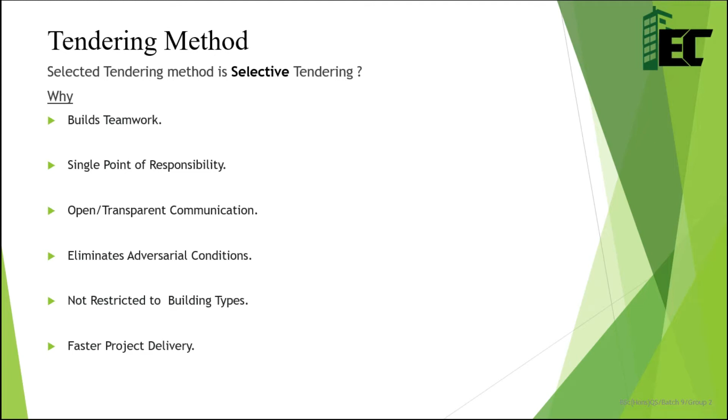Next, let's see what is the suitable procurement method. We choose the design and build method. There are five types of procurement methods: traditional method, measurement contract, design and build contract, package deal contract, and turnkey contract. We choose design and build because in this method the contractor gets the responsibility of planning, designing, organizing, and controlling.

In the traditional method there is a mismatch between the designer and contractor, but in the design and build method there is no such mismatch, so it is the most suitable. Advantages include low cost, low cost of documentation, better quality of workmanship, and competition only among similar categories.

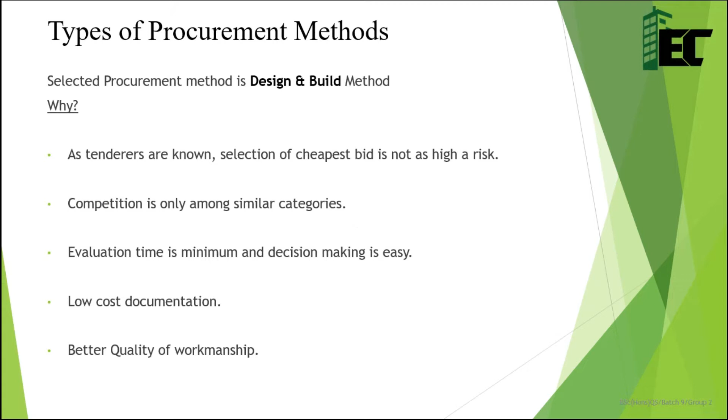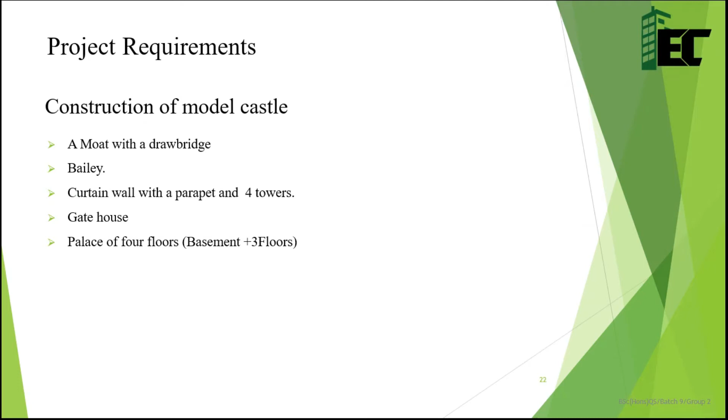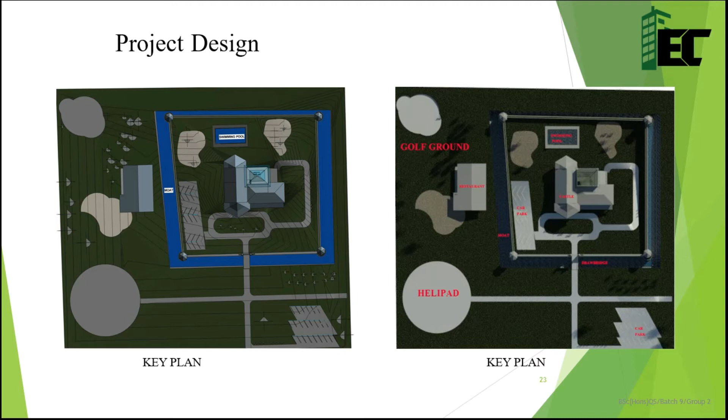This is the key plan. We have arranged the palace, swimming pool, roads, car park, golf ground, restaurant, and helipad. This is the construction plan, front elevation, and roof plan.

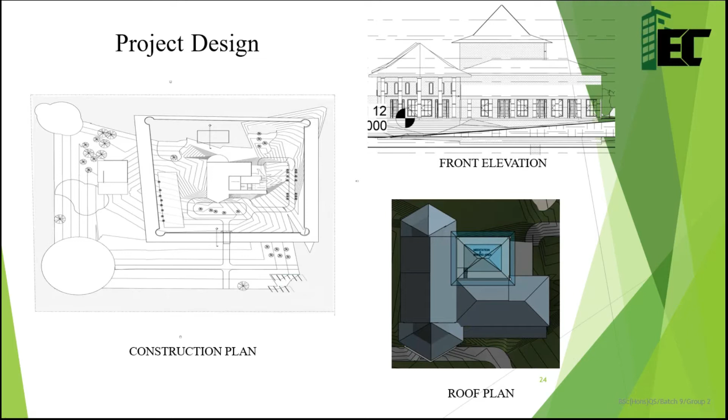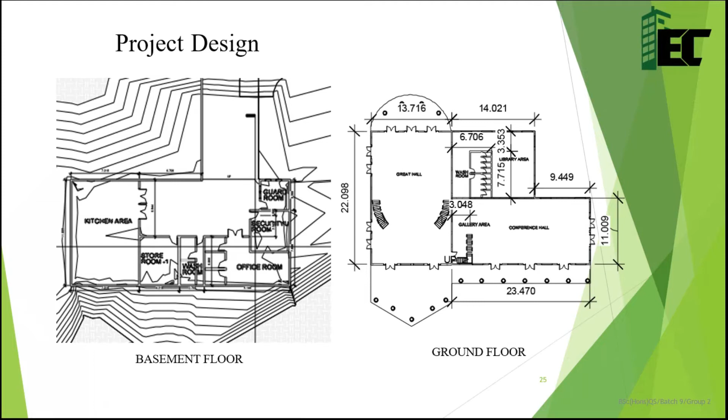Next, the ground floor areas: great hall, washroom, gents and women's washrooms, and especially an additional disabled people's washroom. We also arranged a conference hall with a library and gallery in the conference hall.

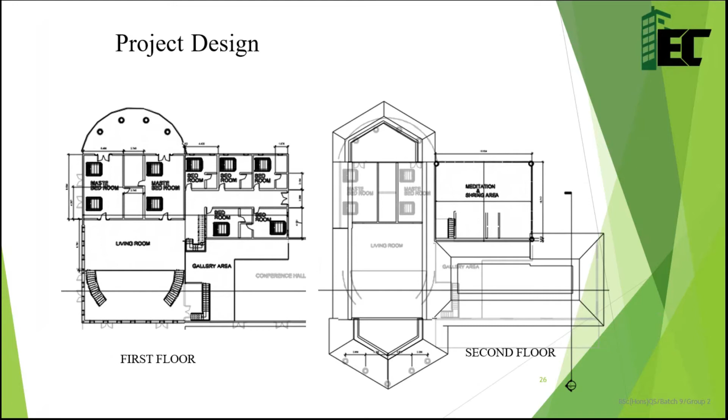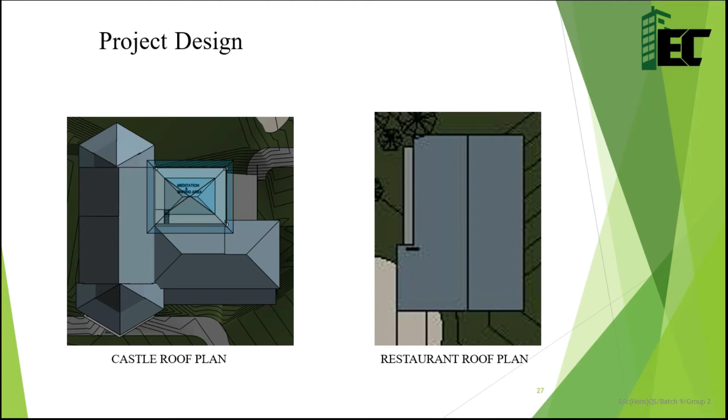The second floor is arranged as roof plan, a castle roof plan with an attached restaurant. This is the 3D plan view.

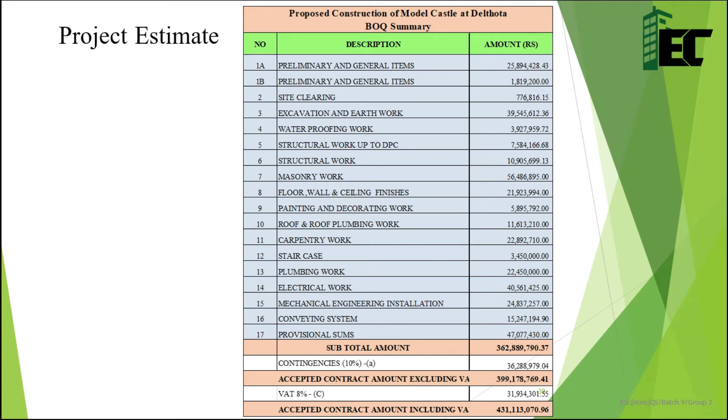Then, according to our quantity surveyor's plan, I calculated the project budget.

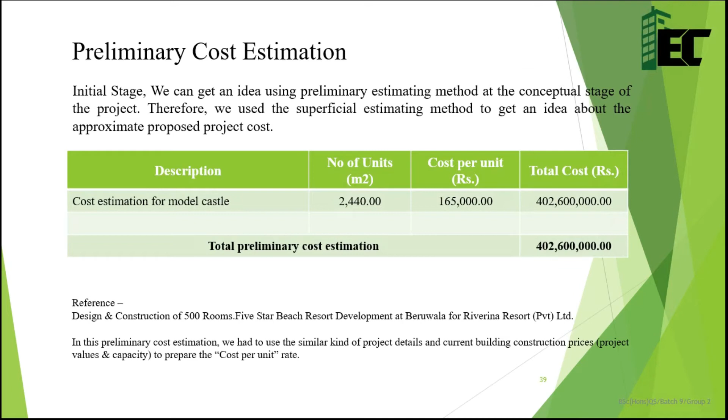Estimated value is 399 million. I have allocated 1% of the total estimated amount for architectural design work. Engineering and consultancy allocated 5%. Then initial operation cost is around 2.5 million allocated. Our project total amount is 425 million rupees.

Value added tax 8%, which is 31 million rupees. According to the total calculation, our project budget is 457 million.

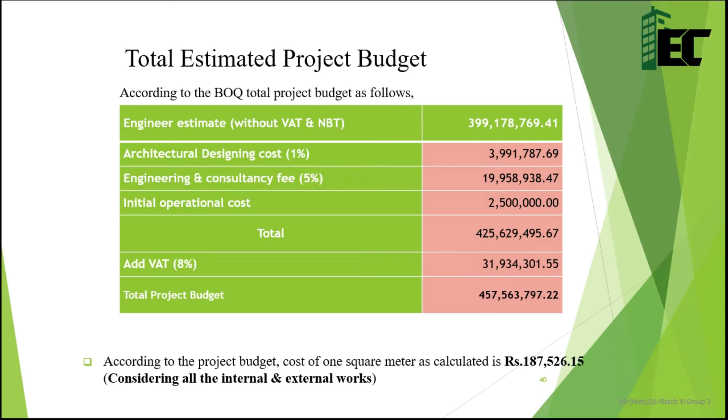Then we have to calculate revenue generation and income generation activities. We have to identify them. I have identified some activities. For example, in our project we have some type of rooms which we can rent out. Then we have to allocate a retail shop. Then we can locate a golf and sport area in our land area, and another one is a spa.

Then we plan a club and restaurant outside of our building area. We can arrange an outdoor restaurant, and then we can also arrange some outdoor activities and functions.

According to my consideration, I have calculated all expenses and income generating activities, and I allocated a discount factor of 10%. Then I have calculated our project's revenue generation.

How our income is gained, we can analyze this through four methods. In financial feasibility studies, we have four methods. According to these methods, the net present value method.

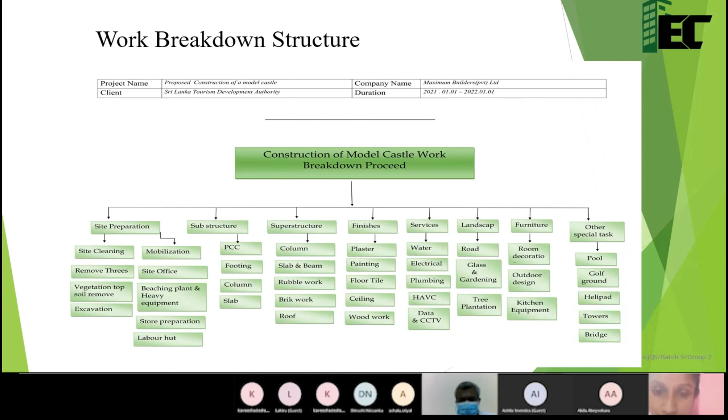Here is our work breakdown: site cleaning, removing trees, and preparing.

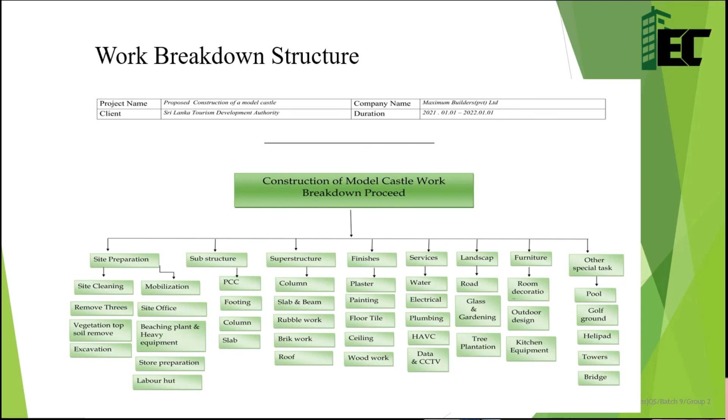I'm Machala, the safety and health officer in the project. As HSE officer, my main concerns are risk management and HSE issues related to the project. Risk management is a process of identifying the related risks and hazards, assessing the extent of the risks, evaluating its weight, and taking steps to control the risks, including further monitoring.

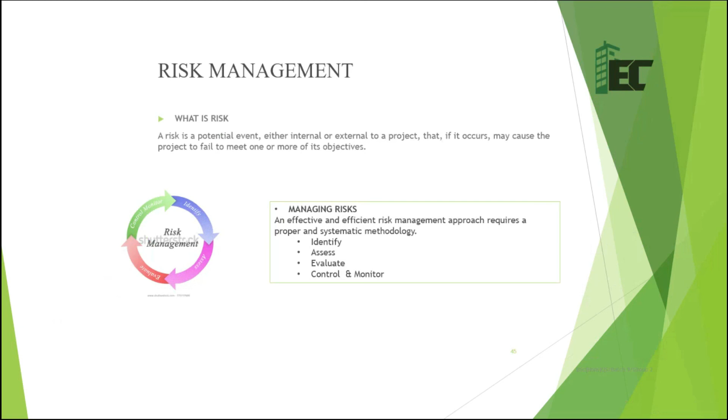We are using risk matrix to assess the risks related to the project, considering the category of likelihood against the category of consequence severity. Risk likelihood is categorized as rare, remote, occasional, frequent, and almost certain. The severity of the risks is divided into catastrophic, major, moderate, minor, and negligible.

By feeding identified risks into this matrix, we have assessed and evaluated risks, allowing us to decide on controlling methods.

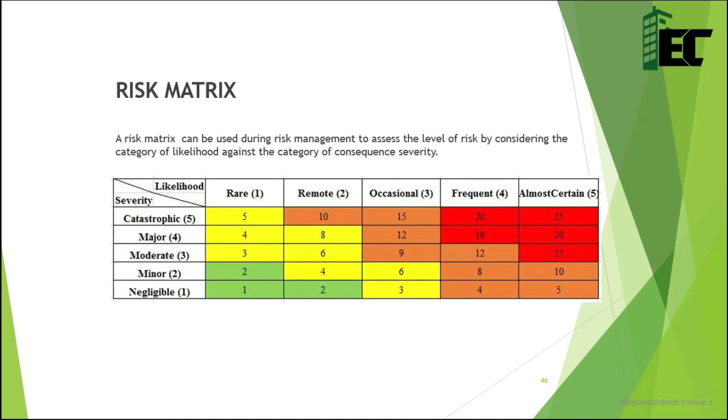There are a few major risks which rose our concern. Since almost the whole world is suffering from the COVID-19 pandemic, and health experts predict it may last a few years ahead, we may have the risk of project delay and cost overruns due to pandemic waves and other related issues. However, we have suggested risk control methods here.

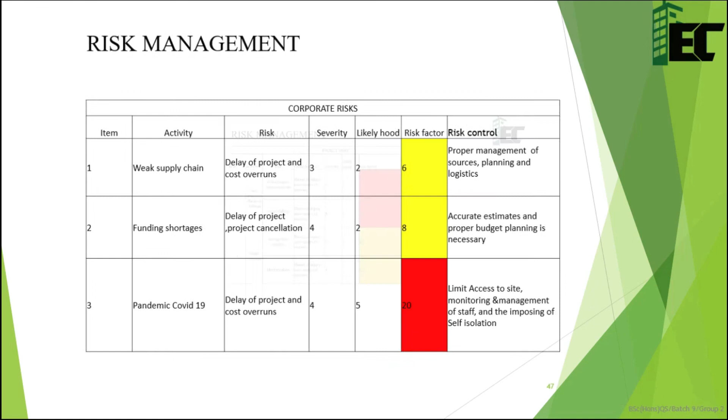Also, our design includes a basement and a moat, which demands deep excavations. We can mitigate the related risks with proper shoring methods as applicable, and by maintaining required slopes with benching related to the moat.

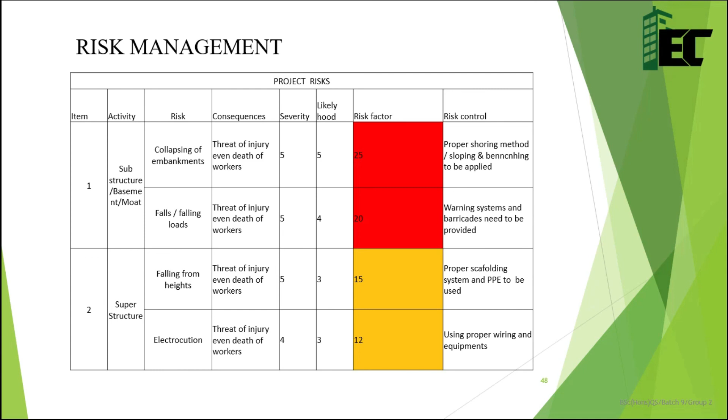Health and safety is also a major concern of the project since it is related to the well-being of staff and visitors at site. For timely completion of the site, proper working capability should be ensured. All personnel should be properly educated regarding safety precautions. This can be achieved by safety training programs and frequent meetings. Adequate PPE should be supplied, and their proper usage during the works by workers should be ensured.

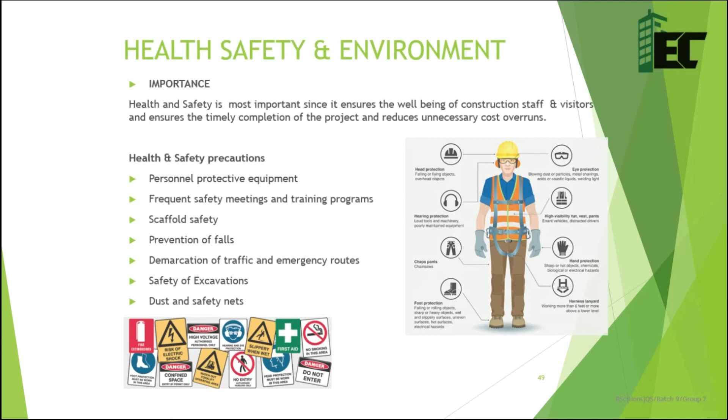Since this is a hotel project, and our area is likely to be a biodiversity sensitive area, we have to acquire permissions and clearance from authorities such as SLTDA and CEA.

Waste management is a main concern when it comes to sustainable development. We are suggesting a sewage treatment plant to safely dispose of soil water, and solid waste should also be segregated properly to adopt recycling and reuse.